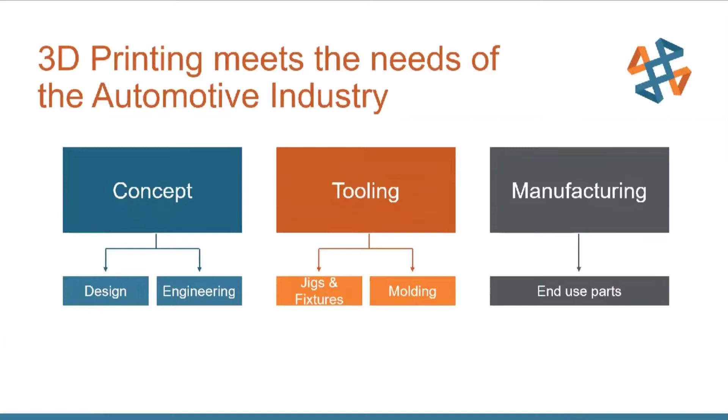It is important to note that as each phase of production progresses, cost and risk increases. Therefore, communicating and investing in the earlier stages can be most effective in saving time and money in the development cycle of the automotive industry.

Let's look first at some examples of how the automotive world is using 3D printing in the concept phase of design and engineering.

Dana Corporation has needs to validate designs quickly and capture errors before wasting time and money. Dana uses FDM, or fused deposition modeling, to create functional prototypes in a few days, saving weeks or months over machined models, with up to 90% cost savings. As a side benefit, FDM parts are strong enough for engineering to evaluate the mechanical performance of the design.

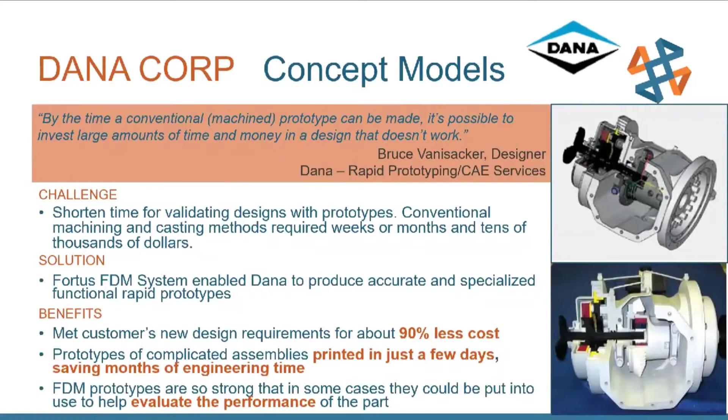Premium Transmission is a manufacturer of mechanical power transmission products. 3D printing empowers the creativity of the engineers to accelerate their product design cycle, reducing time from 42 days to 4 or 5 days. That's a 90% improvement with complex designs and a 75% cost savings. Saving time and cost is key to profitability.

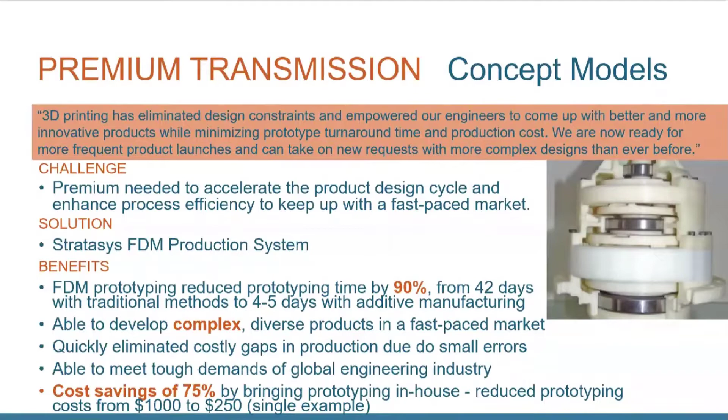Next, let's look at a quick video of how Bentley Motors is utilizing 3D printing to help engineering and design groups.

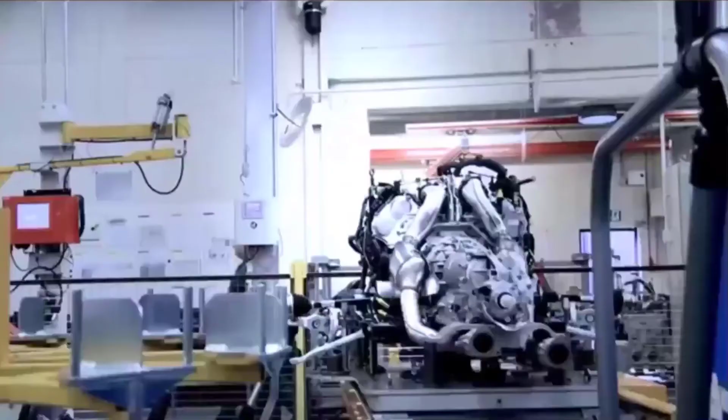Welcome to Bentley Motors. I'm David Hayward, the Operations and Projects Manager for the Bentley Design Studio. My name is Kevin Baker. I work at Bentley Motors. My job here is I'm in charge of the design modelling function, which means that all the design models we have here in Bentley are my responsibility to deal with.

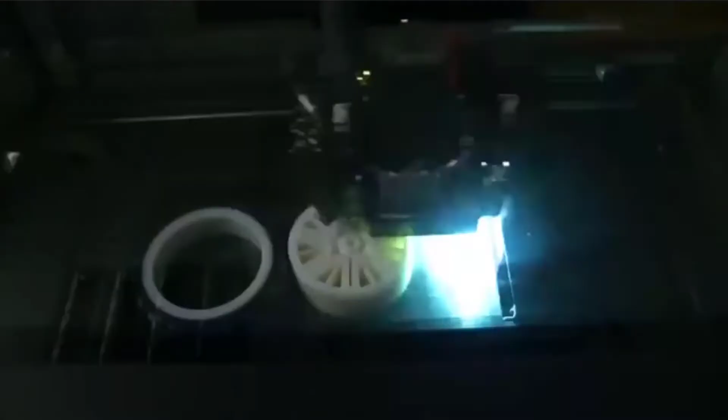One of the latest technologies that we have is the rapid prototype system, which allows us to develop things in a totally new way, from small scale models to a full-size model. The accuracy of the machine also gives us the ability to take a full-size part and scale it down to a 1/10 scale. Once we have approval at 1/10 scale, we can then move on to our larger production machines to produce 1/3 scale models and also full-size parts.

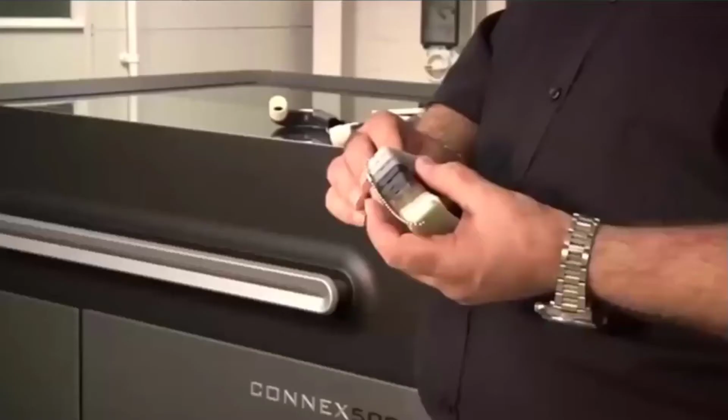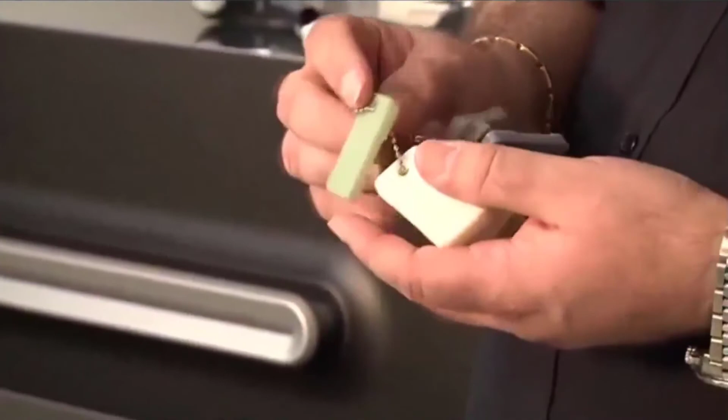The advantage of going to the larger machine is that we've got the ability to use multi-materials within the same printing process. We can go from a rigid plastic through to a clear, and then finally up to an ABS material that gives us the ability to support parts being made for the other engineering functions. We also have the ability to produce rubber components, with a variety of tensile strengths.

Currently the machine is making some 1/3 scale wheel rims and tyres. An example of this is this part, a 1/3 scale tyre that will eventually be used within a 1/3 scale model. We've put designs for the actual glassware itself and the decanter. Again, with this machine, we could produce those in clear. There's a number of parts that we can make on the multi-material machine that we have.

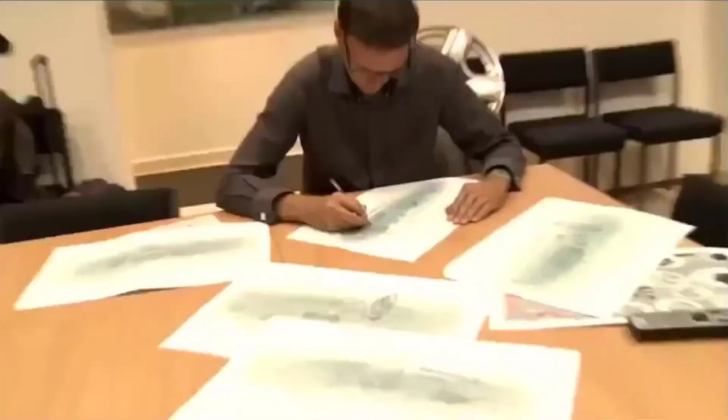One of the ones that we do on a fairly regular basis is the tailpipe trim. We can reproduce grills, mouldings, headlamps, door mirrors, and every part that we see on the car, either on the interior or the exterior. A design intent production model lets us simulate what the car is really going to look like. This is how the technology is moving forward. What we're really showing our bosses is absolutely reality.

Honda is using polyjet printing to coincide with development as well as creating the vehicle OEM accessories. The designers can be more creative and customize accessories, improving designs with real-time feedback. They find it cleaner, quieter, safer, and easier than CNC methods.

Racor is a division of Parker Hannifin Corporation, a global innovation leader in fuel, air, and oil filtration systems for internal combustion engines and fuel delivery. They find FDM prototypes durable enough to use for functional testing. The example uses PPSF material. However, since this was published, Stratasys has introduced a new PEKK, or polyetherketoneketone material, that is chemical resistant to fuels and fluids used in engines. We will discuss more materials later in the presentation.

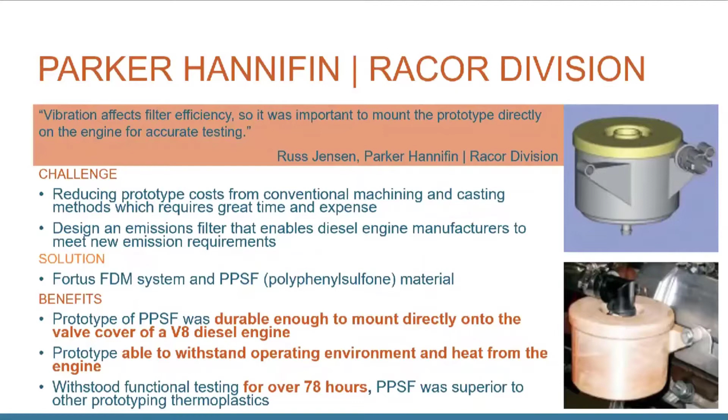Next, let's take a look at video from Polaris and how they use 3D printing in their transportation segment.

Polaris is most commonly known for producing high-quality snowmobiles, off-road vehicles, and motorcycles. We developed our first snowmobile over 65 years ago, and we've continued to develop new products and innovate ever since.

With all the hands-on assembly work that we do in the plant, we've begun using 3D printing to change the way we think about tooling solutions for problems we face every day on the line. A lot of what we do works around different styles of tooling, from regular hard plastic 3D printing materials up to some of their new, more innovative materials.

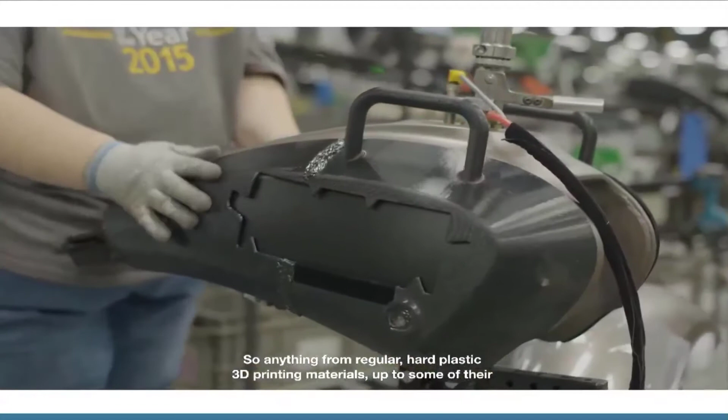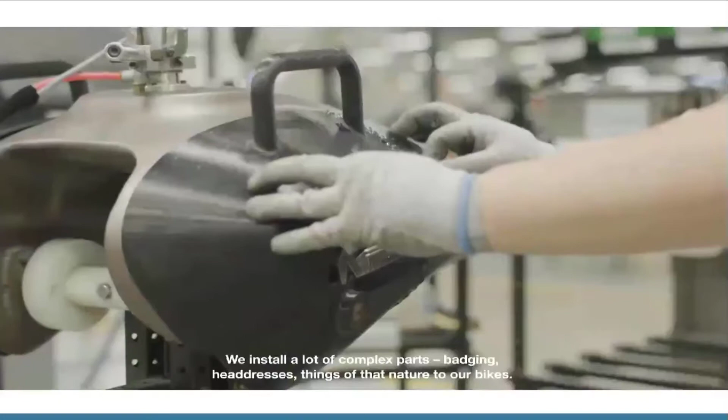So the biggest benefit of partnering with Stratasys and their technology is the ability to iterate on new tooling designs—being able to come up with a design, test it, improve on it, and repeat until we get to a good final product. We install a lot of complex parts, badging, headdresses, things of that nature to our bikes. Having the ability to 3D print that complex geometry quickly and in a variety of materials gives us a lot of flexibility.

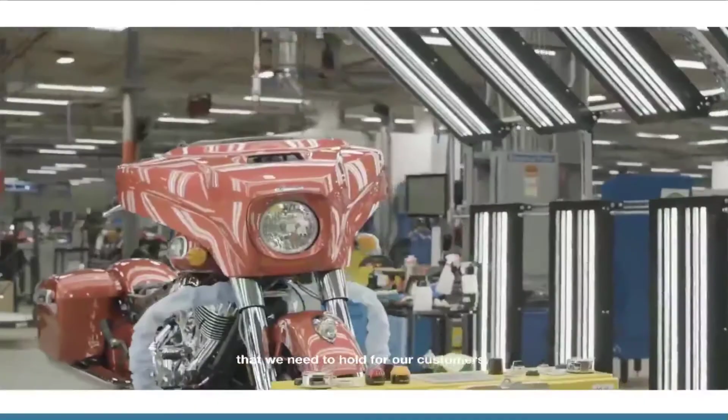We work with a lot of chrome and painted parts, and we have strict cosmetic standards that we need to hold for our customers. So this is where the elastic materials fit so well into our needs. They're soft enough to not damage our cosmetic parts, but durable enough to withstand our assembly manufacturing environment.

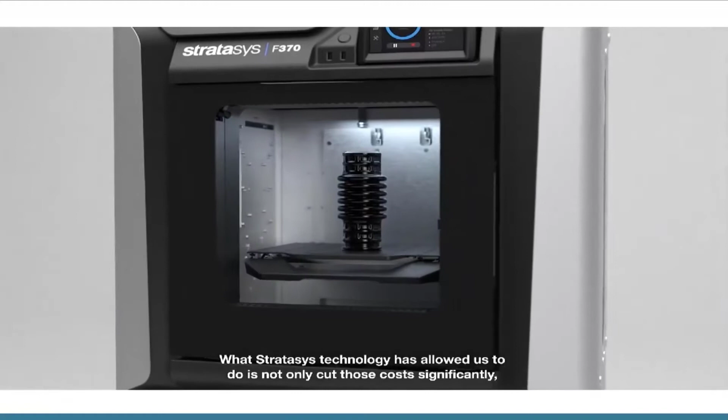What Stratasys technology has allowed us to do is not only cut those costs significantly, but also cut our time for tooling. It's actually been able to allow us to stretch it into other areas where we would not have previously considered 3D printing technology.

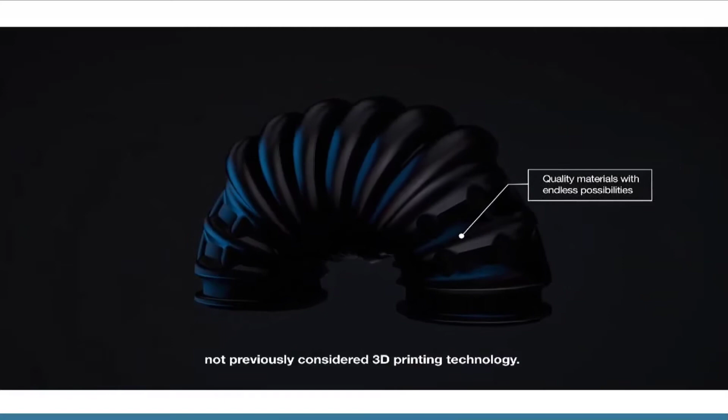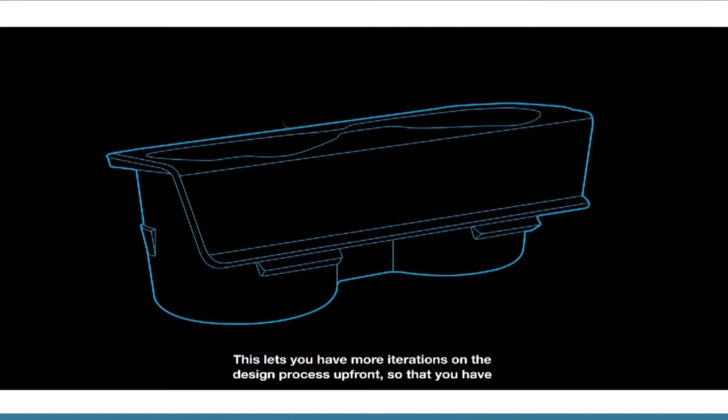This has been a huge benefit to the team. Instead of waiting anywhere between 8 to 12 weeks, we're able to get designs within 24 hours. This lets you have more iterations on the design process up front so that you have greater confidence when you go to kick off your final tools for production.

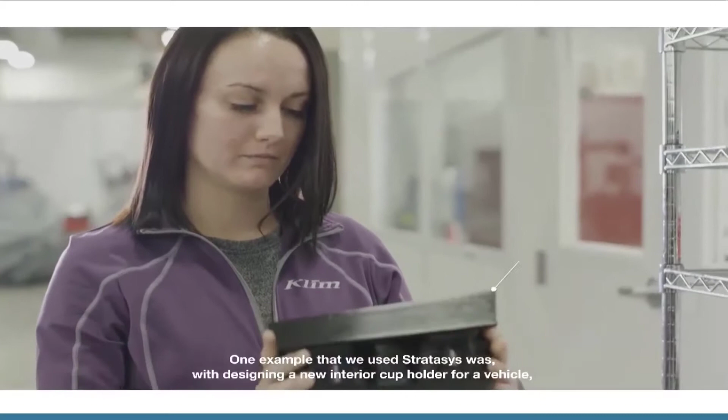One example that we used Stratasys was with designing a new interior cup holder for a vehicle. It allowed us to see overall integration into the interior faster. Actually having physical parts to test things out goes a long way.

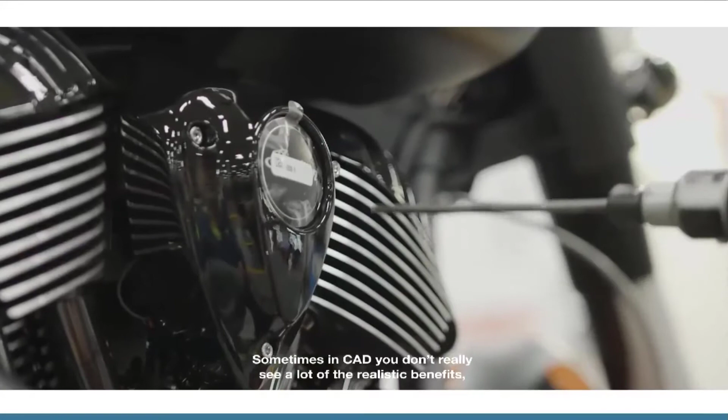Sometimes in CAD, you don't really see a lot of the realistic benefits. So being able to see the part in real life and test different scenarios and make sure that it fit into the new interior was a huge benefit for us.

We've been working with Stratasys for over 20 years, and our partnership with Stratasys allows us to have robust printing capabilities in-house, which reduces our lead time and lowers our cost.

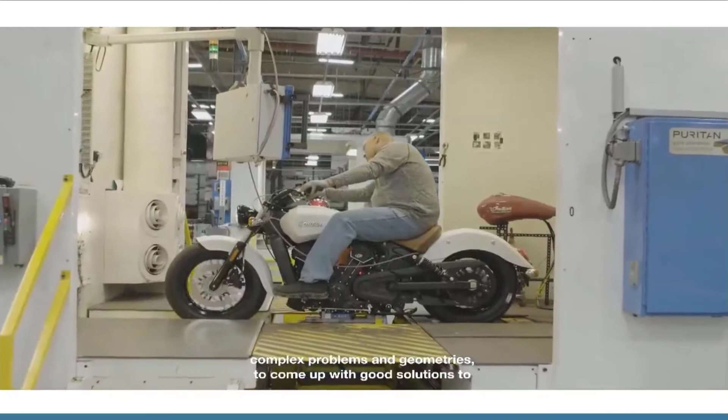Working with Stratasys has helped us open our minds to what's possible with very complex problems and geometries, to come up with good solutions to enable productivity, quality, and speed of our manufacturing process. The quality of Stratasys equipment gives us the confidence that we're going to get a good part the first time, every time.

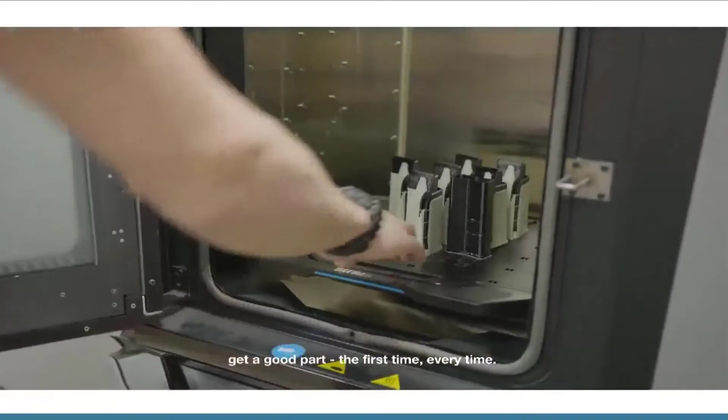The early exposure to new materials has been very helpful. Being on the front line of the new elastomer material and getting to try that and use it in production early has been super helpful. It's really broadened our horizons on what we can do for 3D printing, applications we would not have previously considered.

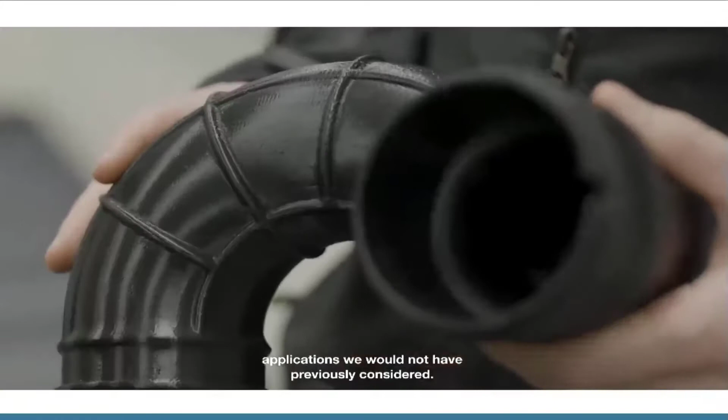At Polaris, we're really excited about the future of additive manufacturing, and we're looking forward to continuing the partnership with Stratasys.

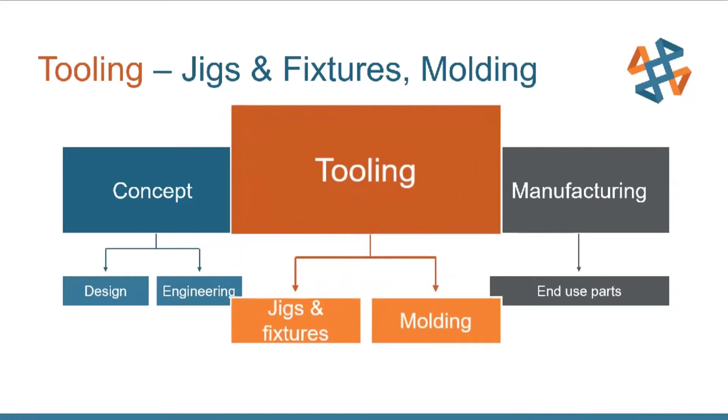After concept with design and engineering, the production cycle now moves to tooling, comprising jigs, fixtures, and molding. Let's look at some successes of tooling applications. But first, let's define the difference between jigs and fixtures.

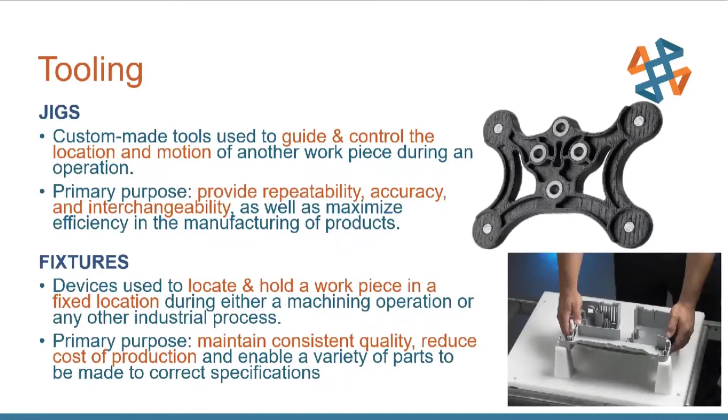There has always been some confusion over the designation of jigs and fixtures. Jigs are typically placed on the workpiece for secondary machining operations. In the top right, you see a drill jig that would be located on the part. Fixtures locate or constrain the workpiece for machining, inspection, or assembly. In the lower right, you can see an inspection fixture for CMM.

However, Stratasys just released a new material called Diran with the properties of Delrin. Delrin is the most common material used in tooling applications for its stability, wear-resistant lubricity, and non-marring surface texture. We'll be talking more about new materials later in the presentation.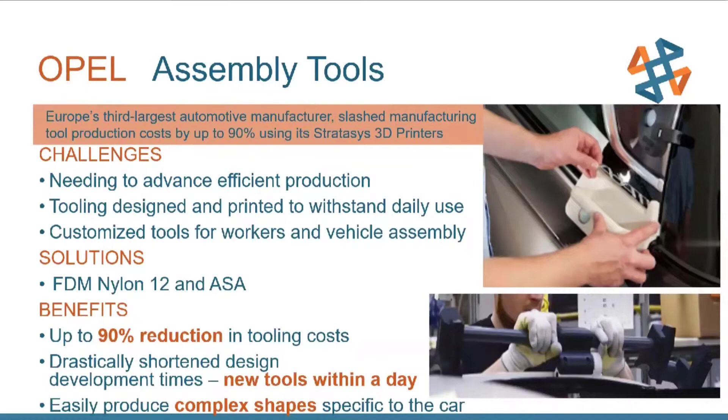Solaxis is a supplier to leading manufacturers in the transportation, defense, aeronautics, and other industrial sectors. Their challenge is not just the cycle time, but the size and weight that is required for some tooling.

Using high-strength Ultem 9085, they eliminated 66% of the weight to where a single person could move the tool, and added a 25% reduction in cycle time, saving hundreds of hours. This new jig resulted in higher profits.

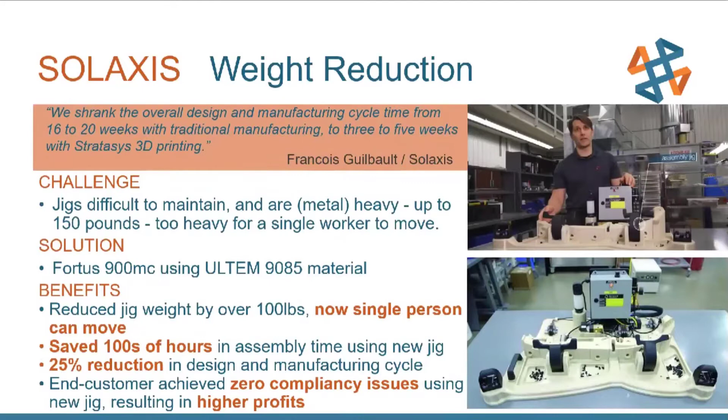And here, let's take a look at a video of those printing successes by Stratasys.

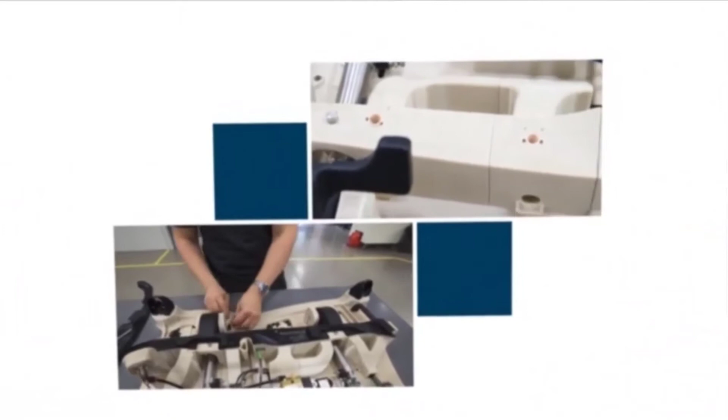This is an automotive assembly jig. It's designed to help the operator quickly and efficiently assemble all the products coming off a press.

Bonjour, my name is François Guilbault. I'm the owner-president of Solaxis, and we're located in Bromont, Quebec. We use 3D printing everywhere because it's our core business, especially for specialized tooling and functional parts.

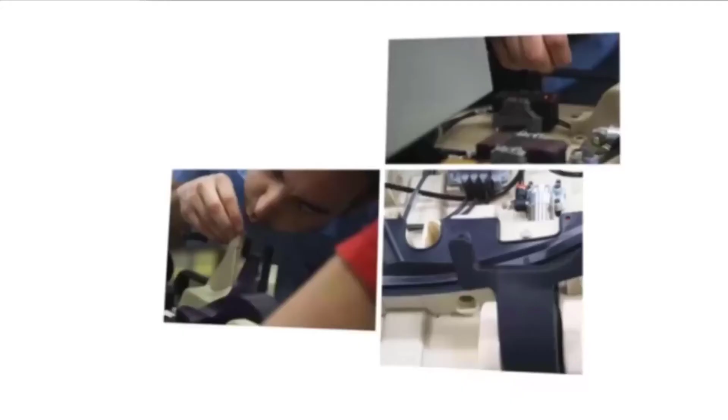They had a targeted solution. They wanted to make sure all their operators could lift the desktop jig by themselves. Stratasys 3D printing really helped us speed up everything. Normally these jigs are traditionally made with other types of machining in 16-20 weeks. We managed to do all this with Stratasys 3D printing in 3 to 5 weeks. Everything was to speed up production.

We brought the buttons closer to the operator. We brought the clips closer to the operator. It was really optimized on every version of subsequent projects.

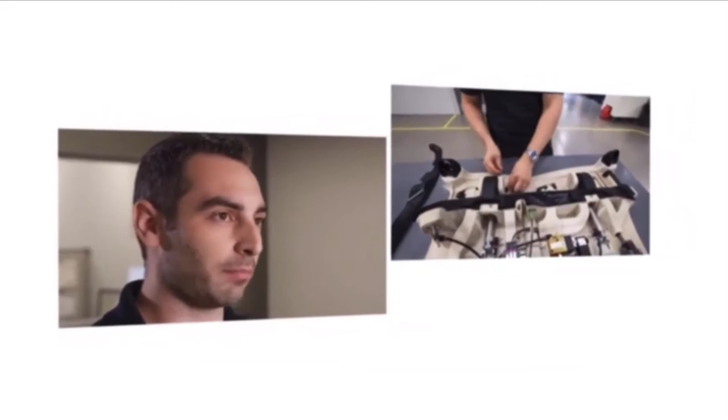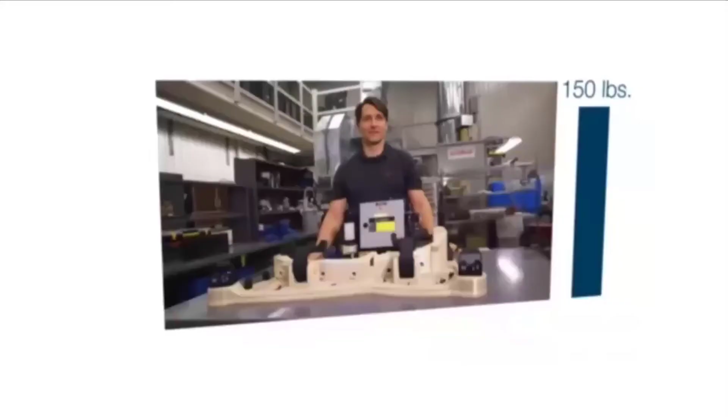The benefit for our customers of having the jig redesigned and modified helped us reduce their cycle time by 4 seconds per cycle, knowing that they're doing almost 250,000 parts per year. Also, having a plastic jig instead of a metal jig allows them to reduce the weight of the jig, so it's very lightweight, only about 28 pounds.

Stratasys 3D printers are mostly unique because of the fact of having thermoplastics. So extruded plastic allows us to have really stronger parts. You don't need to think about the tooling. You're really free to create the part however you want.

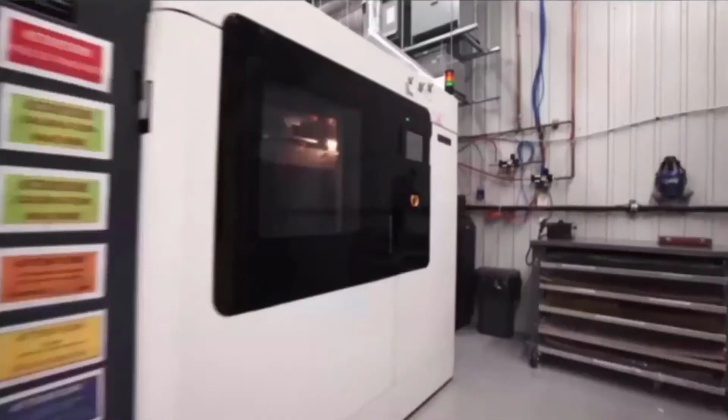We started with one Stratasys 3D printing system, and now because of demand, we're up to 5. In the automotive industry, 3D printing is really moving from prototyping to manufacturing applications. It's really in supporting tier 2 or tier 3 manufacturers that are supplying automotive industry large OEMs, getting all their product out there faster.

Team Penske is one of the most successful IndyCar racing teams, and when a tenth of a second counts, Team Penske turns to 3D printing. Taking full advantage of tough, reliable materials like Ultem 1010, as well as using ST130 for sacrificial tooling to produce lightweight carbon fiber wrap components. Here's an example of reducing weight for a refueling housing used to refuel cars faster in the pit stop.

3D printing reduced their tooling lead time by more than 75%. And now with Stratasys' introduction of nylon 12 carbon fiber material, they're replacing metal parts with strong carbon fiber parts, giving Team Penske a clear advantage.

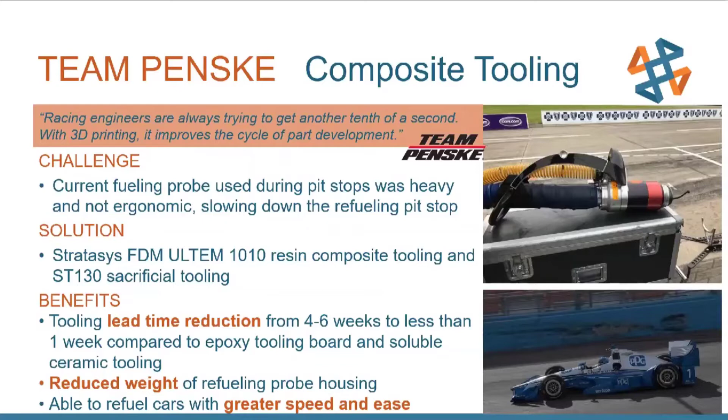Which brings us to the manufacturing of end-use parts. 3D printing the finished parts on a car can be done indirectly or directly. Here are some examples.

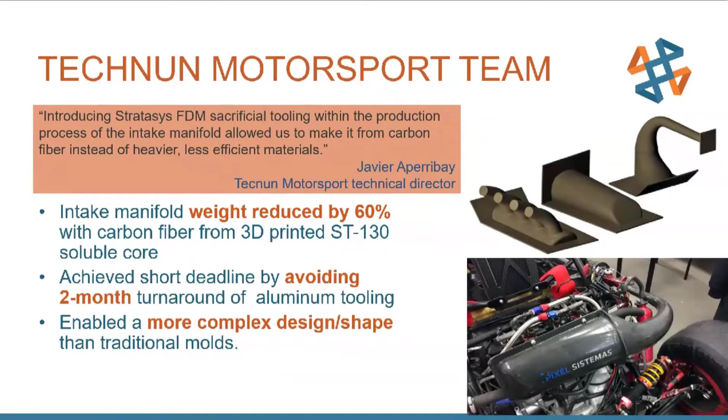Here's an example of indirect manufacturing by Tecnun Motorsport team. Just like Team Penske, they are utilizing sacrificial tooling, which builds a mold or form from soluble ST130 material that is dissolved away after being carbon fiber wrapped. This method allows more complex shapes and designs to be produced quicker and achieve a 60% weight reduction. For automotive racing teams, weight can be critical, but time savings is an added bonus.

Daihatsu is encouraging customers' self-expression in customizing their cars. Using ultraviolet-resistant ASA material, customers can create or choose personalized skins for their vehicles.

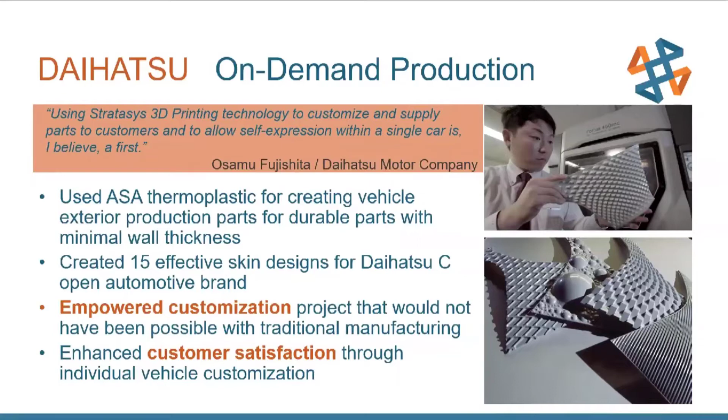And one more application: here's Jay Leno using 3D printing to create replacement parts for his classic automobile and motorcycle collection. Jay is well known for his extensive collection and creating a digital inventory of parts where drawings and tooling no longer exist. Material development continues to be key to expanding applications in the automotive industry, from ABS to UV-resistant ASA material, ultra-strong carbon-filled nylon, high-temp Ultem, and chemical-resistant PEKK.

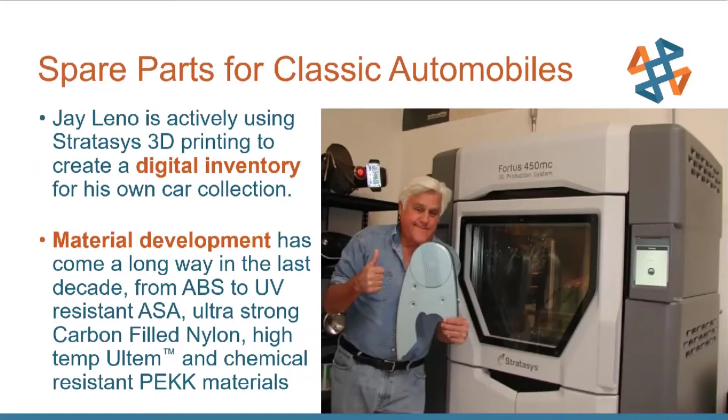So how did Stratasys become the expert over the last 30 years? By building up a tremendous portfolio of systems and materials that allow automotive manufacturers to really take advantage of the benefits additive manufacturing brings. Let's take a quick overview of the technology and the portfolio.

Stratasys invented the FDM, or fused deposition modeling technology, in the late 1980s. FDM remains the most common method of 3D printing today for both hobbyists and industrial use. FDM takes heated thermoplastic filament and extrudes it layer by layer to create a three-dimensional part.

Stratasys uses two print heads with two different materials. One print head is dedicated to the model material, while the other has support material. Most hobbyist machines use the same material for model and support, making it difficult to separate the support from the finished part. Stratasys often uses dissolvable support material to make it even easier and faster to get to the finished model you need.

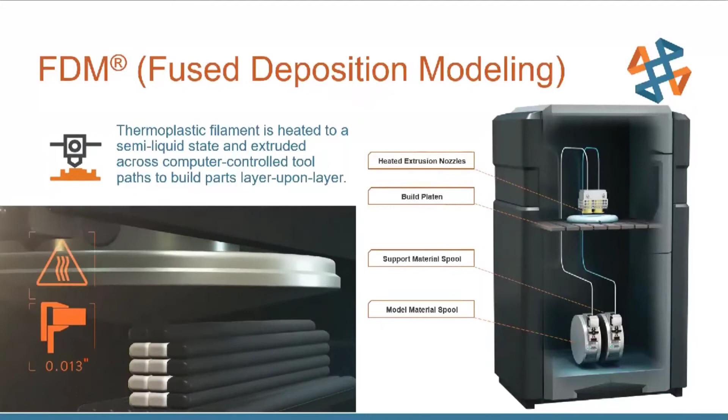FDM machines can build in 0.005, 0.007, 0.010, 0.013, or even 0.020 inch layers, depending on the material and the machine. If you need good detail, 0.005 inch layers will do the job, and if you need your model fast, 0.020 inch layers will meet your need for speed.

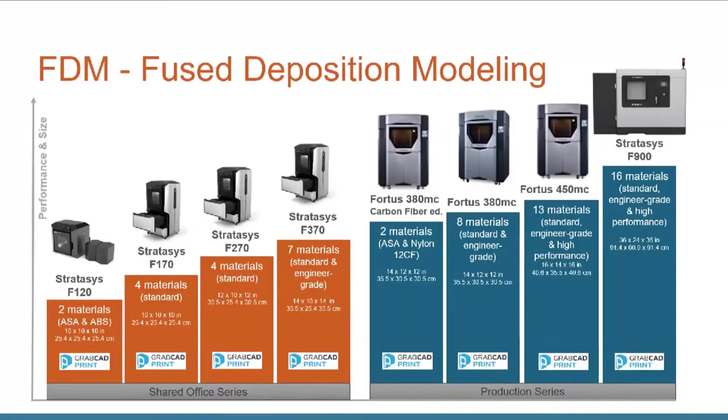Here you can see the different machine options shown by size and capability. The shared office series is made up of the F123 series with different build envelope sizes and materials available. The production series increases build size as well as material options. All FDM machines use GrabCAD print software to prepare jobs. In addition, the F370 and above can also use advanced Insight software to control each individual layer.

Looking at FDM materials, let's start with a thermoplastic elastomer. Stratasys now offers a TPU with a 92 Shore A value. For automotive uses, a protective rubber boot or a textured cover for a brake pedal can be built for design verification without investing in any tooling.

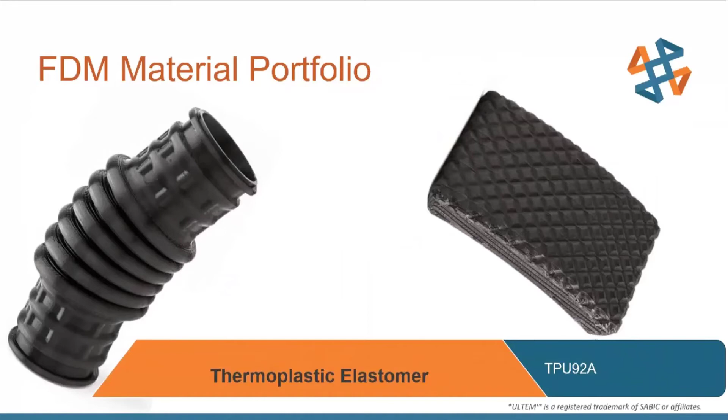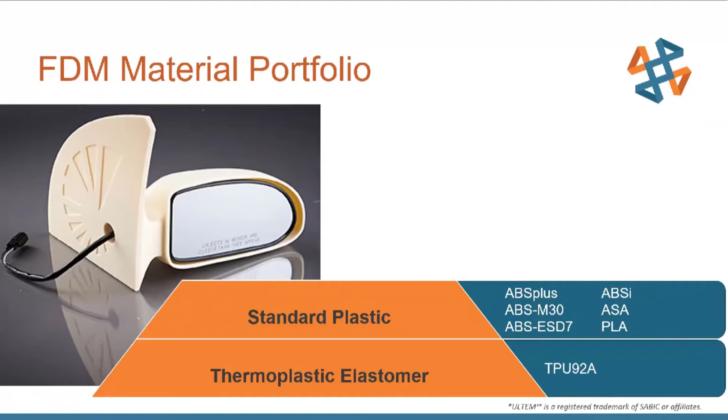There is a wide array of standard plastics, ABS being the most common in the industry. ABS with ESD, or electrostatic dissipative properties, can be useful for electronics. The ASA side mirror shown here offers the mechanical properties of ABS while also being UV, or ultraviolet, resistant for things such as outdoor testing.

With engineered plastics, Stratasys offers resilient polycarbonate with PC blends and a couple of nylon choices. New to the lineup is Diran with mechanical properties of Delrin, now available on the Stratasys F370. Delrin is most used in tooling applications for its dimensional stability, lubricity for wear resistance, and non-marring surface texture. Shown here is a robotic end-of-arm tool made with new Diran material.

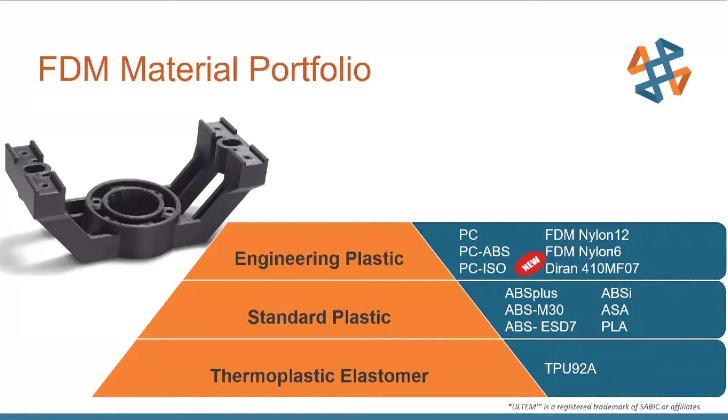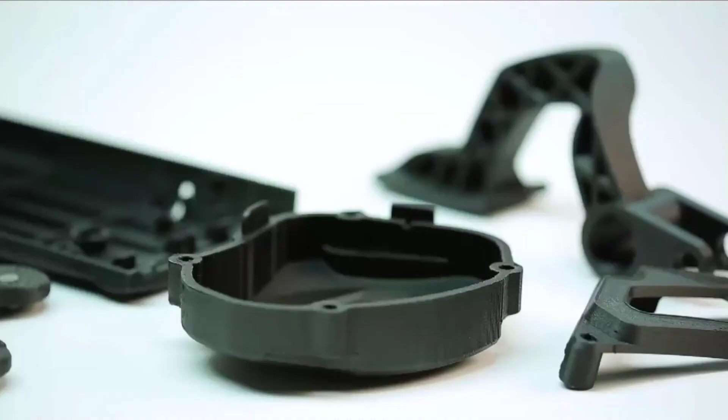So this is the Nylon 12 carbon-filled material. It's the first reinforced FDM composite from Stratasys, offering excellent mechanical strength and a very high stiffness to weight ratio. 3D printing with such a strong, stiff material means you can overcome many of the restrictions you'd usually encounter when trying to build prototypes out of composites or metal. Instead of worrying about how you'll shape the metal or how to make the mold, you can now go straight from your design on screen to a fully functional carbon-filled Nylon 12 prototype in-house, with virtually no limits to your design freedom and creative process.

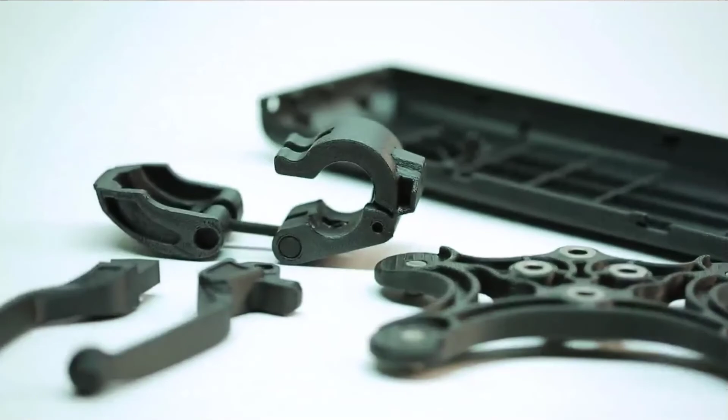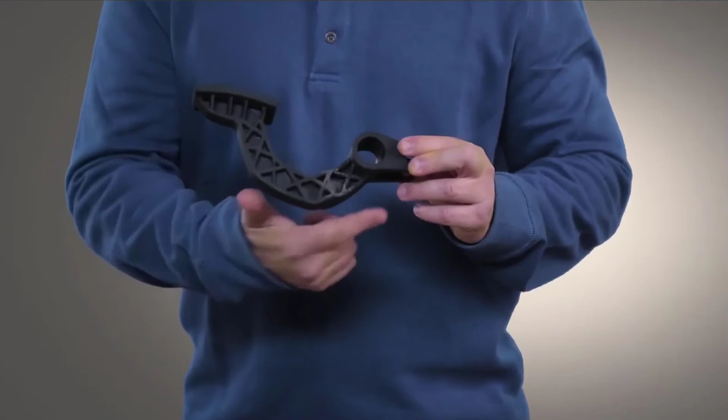Adding to your ease of use is the dissolvable FDM support material that makes it easy to produce intricate parts such as this, without the need for manual and messy support removal. Featuring a carbon fiber length and fill ratio optimized for 3D printing, the results are highly functional, detailed parts that can be tested in demanding real-world conditions.

Being able to come up with a design, validate it, and then comprehensively test it all on the same day also provides an extremely powerful competitive advantage. It means companies can deliver better performing products while compressing lead times and making development costs more predictable. The material is so stiff that it feels like you're trying to bend steel.

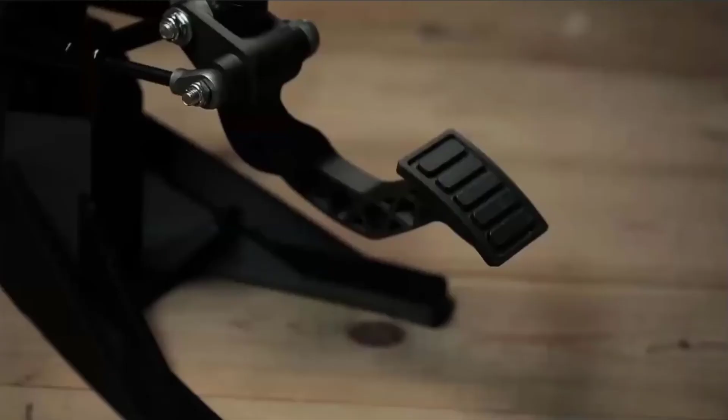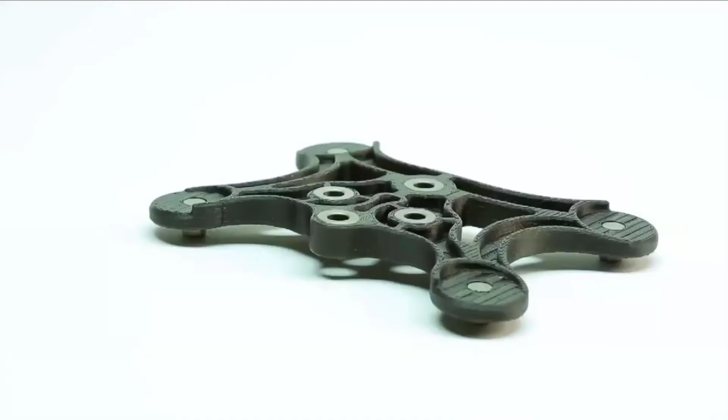Yet it's light and stiff enough to make it efficient for a wide range of manufacturing and tooling applications, where the stiffness of the tool is critical to its function, such as in drill guides, end-of-arm tools, brackets, jigs, fixtures, and metal forming tools. So whether you want to compress your product development cycle with high-performance prototypes or improve your manufacturing floor efficiency, Stratasys Nylon 12 carbon-filled material is now a very strong and very practical material choice.

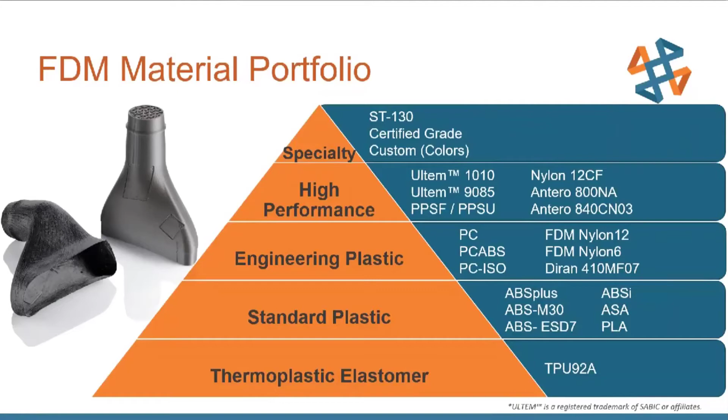And lastly, to finish off our FDM portfolio, we have specialty materials, such as those that offer custom colors, certified grade, and also the soluble ST-130 material. We previously discussed sacrificial tooling in the automotive industry. Here you can see a carbon fiber wrap duct and the dissolvable tool that was used to form it.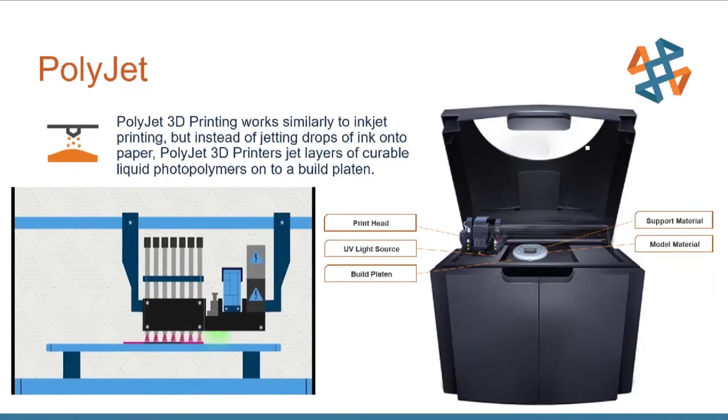And now let's take a look at the PolyJet technology. If you have an inkjet printer at home, you may be more familiar with PolyJet technology than you think. PolyJet uses the same kind of print heads that your home printer would use. The two differences are that Stratasys incorporated a Z-axis so the ink could be built up layer by layer, and they also use a specialty photopolymer ink. Photopolymer materials are hardened with UV, or ultraviolet, light.

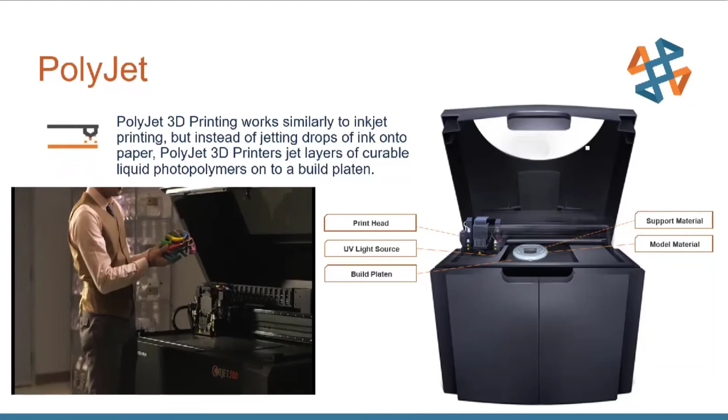Like FDM, PolyJet technology also uses a separate soluble support material that allows you to just wash away the support material from your model. Models can be printed from 36 micron layer thicknesses for a draft mode, all the way down to 14 microns, depending on machine and material combinations.

The Easy Concept model series is made up of machines that can run several materials, but they do not support the mixing of materials for mechanical properties or blending materials to create different shades of color. When you move up to the Connex 3 machines, now you can mix up to 3 model materials to define specific colors or to create different mechanical properties.

Moving up to the Stratasys J835 and J850, loading 8 different materials is possible, including the support, which will yield more than 500,000 colors and blending of multiple materials for specific mechanical properties. In addition, almost 2,000 colors have been Pantone certified.

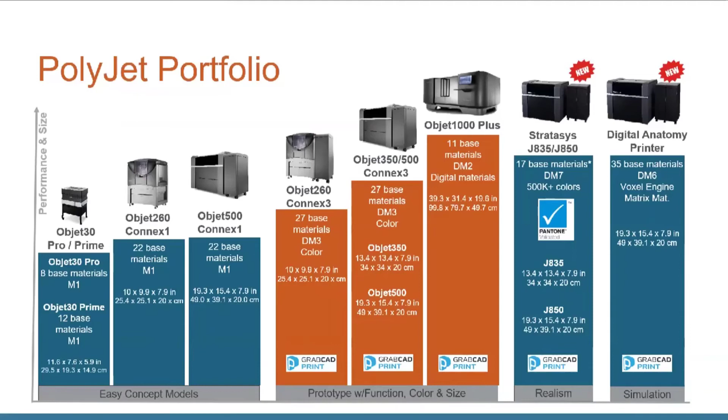And introducing the new digital anatomy printer, specifically made for the medical industry with new materials for medical realism. Most machines use GrabCAD print software to prepare jobs just like the FDM technology, minimizing a learning curve to own both technologies in-house. Here's a quick video about the Stratasys J850.

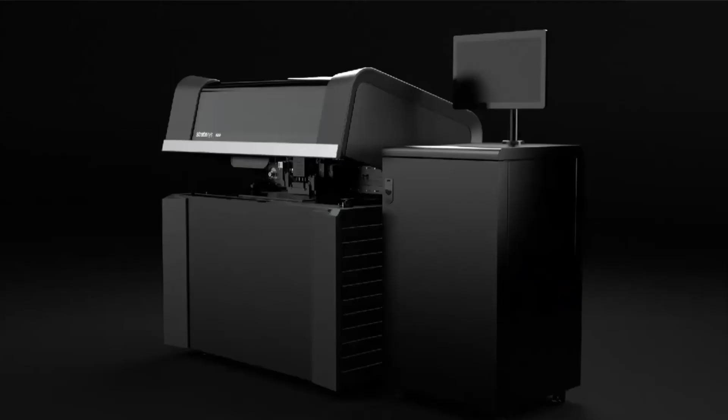So now let's look at the PolyJet material portfolio. To start off, we have the Vero family. The Vero family offers a wide range of vivid, transparent, or solid colors.

Here are a couple of automotive examples with a lens using the Vero Vivid colors, showing semi-transparent color. And also you see a gear shifter that was entirely 3D printed as one piece that's able to simulate wood grain, leather texture, and even the fine details of stitching.

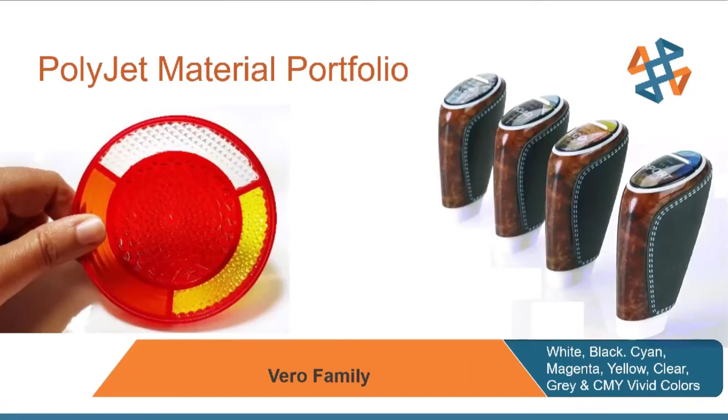Next in the material portfolio are the flexible materials. Agilus 30 with a Shore 30A durometer is the second generation of the flexible material and has significantly better tear strength than the Tango material.

The flexible material can be blended with other materials to modify the durometer, ranging from 35 to 95 Shore A scale, and to simulate the feel and texture on an automotive console to testing the flexibility of a rubber boot are all achievable using these flexible materials.

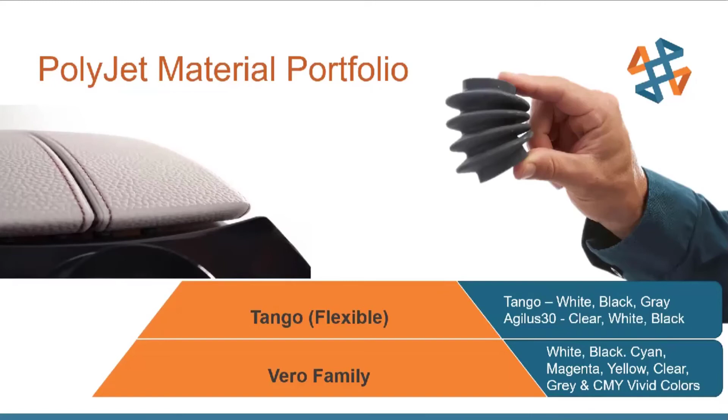Next is the Vero Flex material. It's honestly specifically made for the eyeglass industry. So the only way I can relate this to the automotive industry is if you possibly need some custom sunglasses to match your custom car. But essentially, Vero Flex is stiffer than our Shore A range of materials, but it's more flexible than the Vero rigids.

And for the medical market, which again is not very relatable to the auto industry, but is part of our portfolio, we offer biocompatible and dental materials. There's new ones called the bone matrix, tissue matrix, and gel matrix that are exclusively for the new digital anatomy printer. These materials are specifically built to create structures, textures, and feel for anatomic simulation and diagnoses.

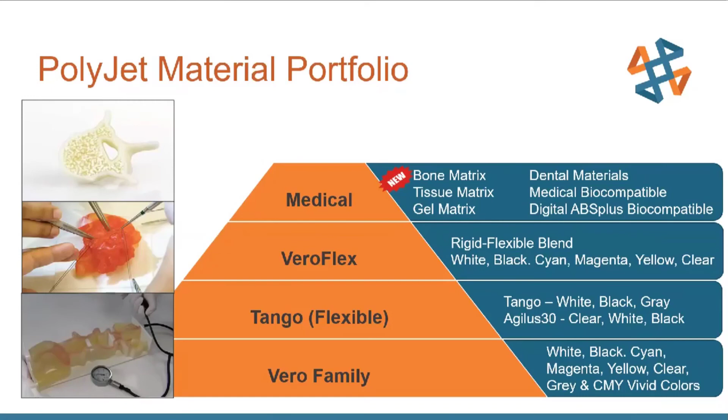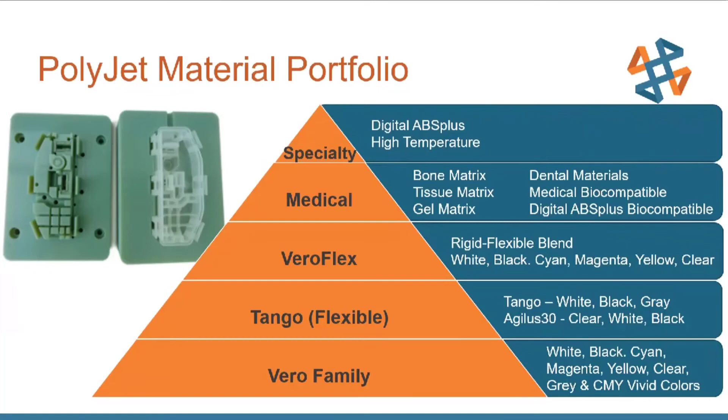That's all with PolyJet. I just wanted to cover a couple things about the GrabCAD print software that, again, runs both the PolyJet line of printers and the FDM line of printers, is cloud connected, and offers some really great capabilities. So again, it works for both technologies.

For anybody currently doing some 3D printing who might be stuck with software that forces you to use the STL format, a very popular format for printing, having the ability to import native SolidWorks, CATIA, Inventor files, and not ever have to worry about tessellations or STL files, is a real benefit.

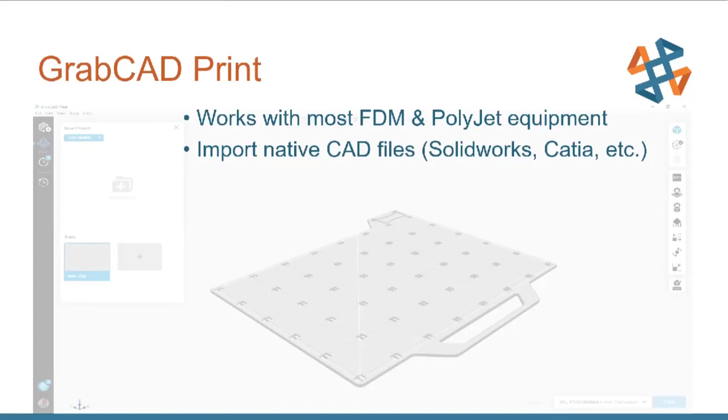So for any STL files or meshes that you still do have, it can automatically correct and repair them. You can estimate your material usage and build time, manage assemblies, so you can actually import a whole SolidWorks assembly, and just toggle a switch to break it all up, and all the parts will be laid down on your print tray.

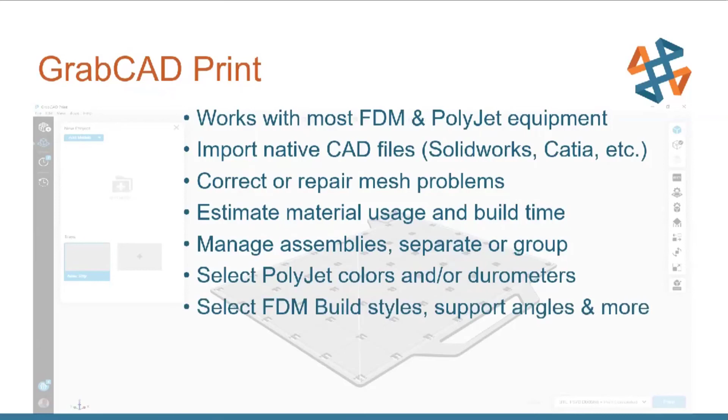You can select the PolyJet colors, assign durometer values, assign different materials to different parts of a part. You can select FDM build style, support angles, etc. So whether you want your part to be solid or sparse filled inside so it's lightweight, all that can be adjusted here.

And then we have some advanced settings as well. So you can really customize certain walls of certain portions of a part to have extra thickness and other ones to have less, so you can save material and time in printing. A lot of customizability. And then we even have advanced Insight software that's built right into GrabCAD and can be launched from it, which will allow you to essentially modify your part through and through, with every layer being customizable.